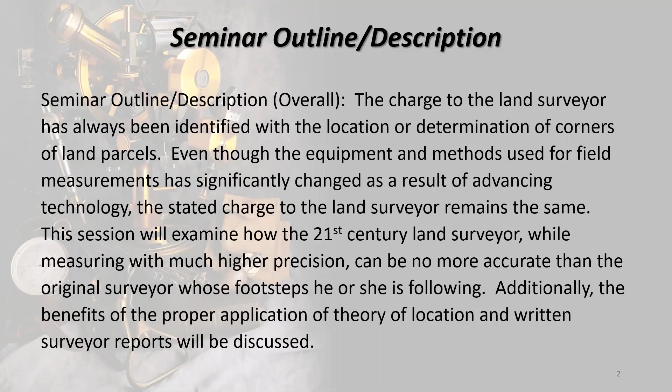So with that, here's the 4th of 4 50-minute sessions on the topic of boundary evidence. And this one is titled Written Surveyor Reports. This session description reads that some states, including Indiana, require written surveyor reports to be included with boundary survey plats. In addition to providing a method to explain the theory of location used to determine the boundary corners, the reports also allow for statements of uncertainty relative to found monumentation, lines of occupation, conflicts with adjoining parcel descriptions, as well as the precision of measurements.

As I look back on the time that surveyor reports were beginning to be required, I remember much mumbling and grumbling of fellow surveyors. For those of you that were in the session we just completed on theory of location, we were about the same time here. Surveyor reports were in that initial release, if you will, of the standards that became Rule 12. Fortunately, some of the surveyors that I spoke most often with, while being reserved about the topic, were not as negative about this new requirement as others.

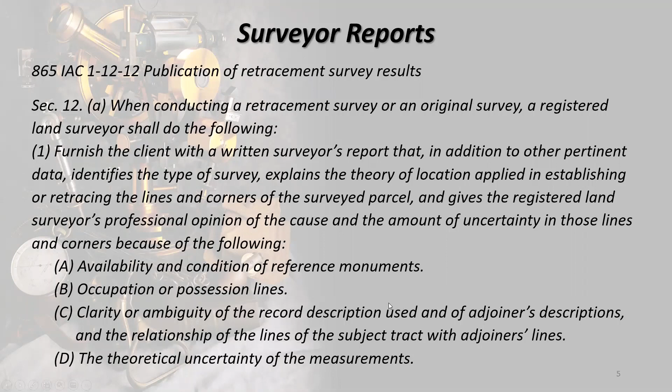Regarding surveyor reports, first off, we can ask a question, why are they necessary? And we'll talk about that. Next, we could ask, what purpose do surveyor reports serve? What's the benefits from surveyor reports? That might be a little bit redundant, but they can also have some separate meanings there.

Who are the surveyor reports written to? I'm going to give you my list, and I always get disagreement if I'm in a live room. I don't think I'll get disagreement today since I wouldn't be able to hear you, but nevertheless, I have my opinion on that. What format, if any, is required? And then we get to why. Well, let's go then and get into that.

And the Board of Registration said if you didn't follow it, you're going to have to come down and talk to us. When I note, because Rule 12 says so, it is not too far from the truth. It was a firm requirement, and those who did not comply, as I said, would likely have to go meet with the Board of Registration.

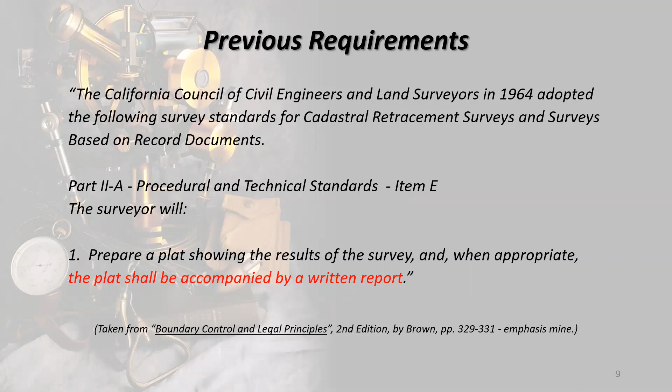And also, the one source that I've cited the most in these 4 sessions here was Evidence and Procedures for Boundary Location, 6th edition. And they have in Appendix A of that text an article called the Surveyor's Report. And it is significantly different than what we're going to see here with what we do with surveyor reports and the mandate for it in Rule 12, but it's a template for a surveyor's report. I don't know if there was a date on it. I didn't go back and look at the older editions of the book to see if it was in there, but I caught it as I was preparing for this session. And I just copied what it said at the beginning there.

It says the document in this appendix is a suggested outline for a report of survey that the professional should prepare to preserve information and to provide the client with an analysis of the work performed. It is suggested that such a report be prepared for each utility survey, but that with a forensic survey, it be prepared at the request of the attorney. We'd have to read into that to see why they would say something like that. I could understand if a forensic survey might have something to do with accident situations or whatever, that maybe the attorney wouldn't want a report to go public. But anyway, the surveyor should provide the client with a copy of the report, but the surveyor should also place a copy in the project files.

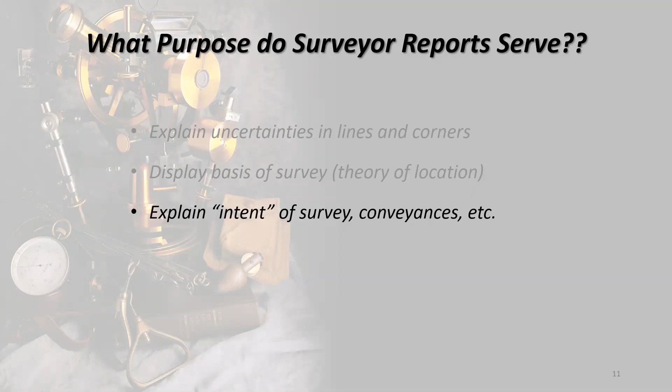In fact, there's new rules in Indiana that if you're going to cut a parcel off of an existing parcel, there's a statement you have to add to the legal description. You might want to look that up. I don't remember the code number, but it was just put in law, I think it was in 2017. You might want to look that up if you're an Indiana surveyor and you haven't heard about that.

Is this an original survey as in a new parcel? That's really important to put there. Someone might be able to figure that out over time, but, and we'll see where I talk about what I typically put in a surveyor report, I state if it's an original survey or a retracement survey. And again, I don't get into personal things, like saying they're fighting here and I'm going to determine who's right and who's wrong, because I don't do that anyways. We just show them evidence, but it's important to know that it's an original survey. Then you know that if it's original, those monuments, that's the parcel. Those are the monuments. Those are the corners.

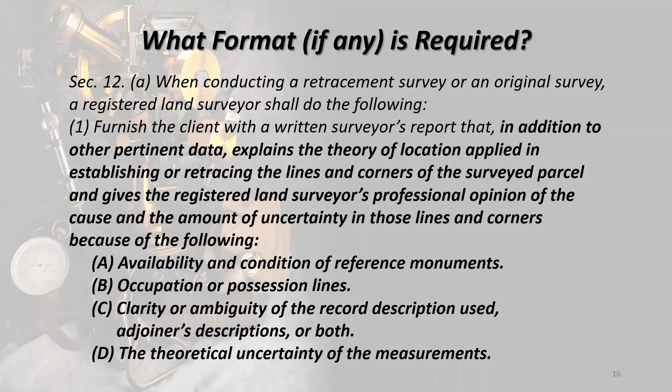Relative to availability and condition of referenced monuments, we got a principle that's in numerous textbooks that says either this exactly or something very close. In order to be controlling, a monument must be called for in the writings, it must be identifiable and it must be undisturbed. Called for in the writings, identifiable and undisturbed. If you don't have all three of those, you don't have a controlling monument. That's why we don't just draw a circle on the plat and not describe what the monument is.

There's a principle that goes along with this out of the evidence and procedures text that says an original monument found undisturbed usually expresses the intent of the parties of the conveyance, fixes that point as between the parties, and as such has no error in position. All restored monuments established by measurements have some error in position. So can we tie these two principles together?

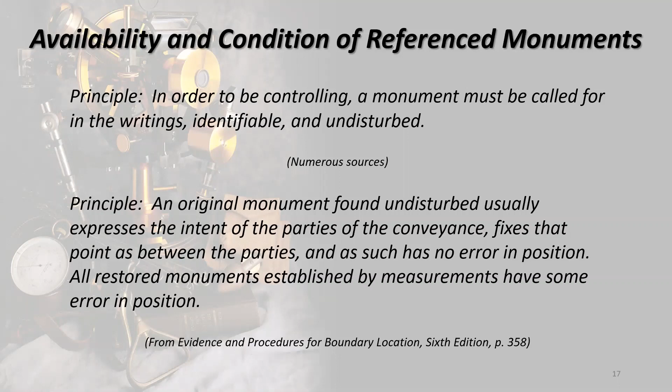If you're calling it an original monument, then you're saying it's been deemed original, so it is controlling. So that now ties directly into what is up above there. In order to be controlling, that means you've determined it as an original monument. The monument must be called for in the writings, identifiable and undisturbed. And then it gives you here what an original monument means. Availability and condition of reference monuments, sticking with that. We could talk about monuments for a whole seminar.

There's a principle from Boundary Control and Legal Principles that says monuments called for in a deed, either directly or by survey or by reference to a plat that the parties relied on, are subordinate to senior rights, clearly stated contrary intentions, and original lines actually marked and surveyed, but are presumed superior to direction, distance, and area.

And then I've got a statement down here that's just a quote. It's not a principle, but it comes from Boundary Control and Legal Principles. And it says that many surveyors are guilty of using non-specific terms such as stake, post, staff, or IP, probably meaning iron pipe or iron pin. You're not sure which one it is. To eliminate future conflict, it is imperative that each monument be identified as to its exact nature, including size, material, and identifying marks. We'll talk more about this as we move on forward here.

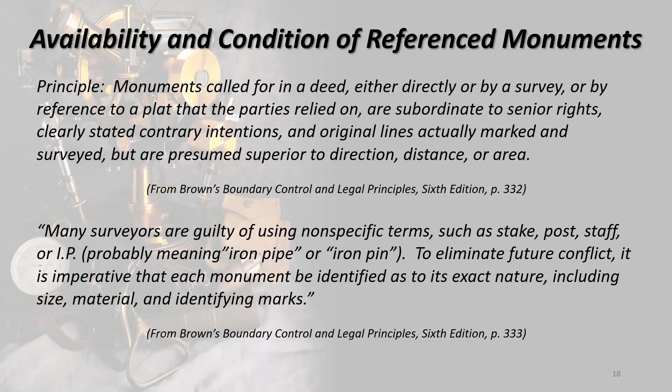And then we have the order of importance of conflicting title elements. And if you took classes on survey law, you undoubtedly came across this. And if you haven't taken them, you probably ran across it anyways, because we refer to this so often. This one is basically taken from Boundary Control and Legal Principles, and this is right out of the most recent edition, the 7th edition.

And I'm going to go through this, because we're going to talk about some of these things as we go through our terminology and relevance to the surveyor report here. We start with A and B, which are two elements that the surveyor really doesn't have a whole lot of control over. The first is the right of possession or an unwritten conveyance, unwritten rights.

And if you know your survey law and your property law, every state has a statute of limitations and a bunch of requirements that are necessary in order for somebody who occupies somebody else's land to rightly at some point gain title to that land by an unwritten conveyance. That's adverse possession, and the other types of recognition and acquiescence and things like that.

Then you have senior rights, and that's in the event of an overlap. That's if you've got a 100-foot parcel and you divide it in such a way and you think you're supposed to have two 50-foot parcels, but the geometry doesn't give you 50-foot widths and you've got an overlap, then the first one, if it's not subdivided, the first deed in, typically in most states, gets their 50 feet, then the other one gets the remainder. Okay, and that's something else that a survey really can't do anything about.

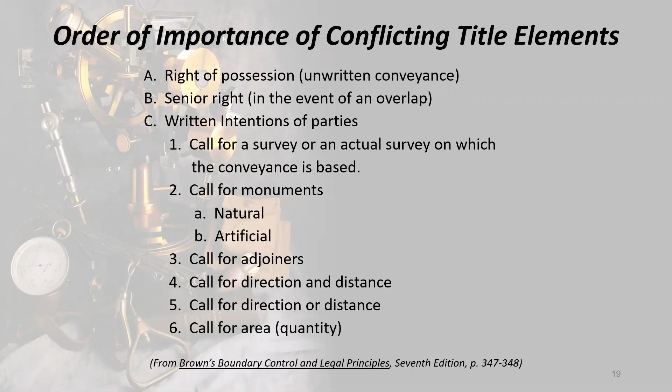Okay, occupation and possession lines. We've got some principles here. Possession may memorialize original survey lines, and as such may be the best or worst evidence of original lines. That comes from Evidence and Procedures. Because original lines surveyed and marked by the creating surveyor control over other elements in a deed, the surveyor must determine whether the line of possession recovered is the best remaining evidence of the original line marked.

And then it says any unwritten right of possession that ripens into a fee right extinguishes prior title rights. And normally, and we should know this as surveyors, a surveyor in the United States does not decide who has unwritten rights. He or she merely notes the evidence of encroachments and evidence of other surveys. The final decision is a legal one that is made by the courts. And we better make sure that if there's an encroachment possible, we show it on our plat, because we can be drawn into that if there was an encroachment and we didn't show it on the plat.

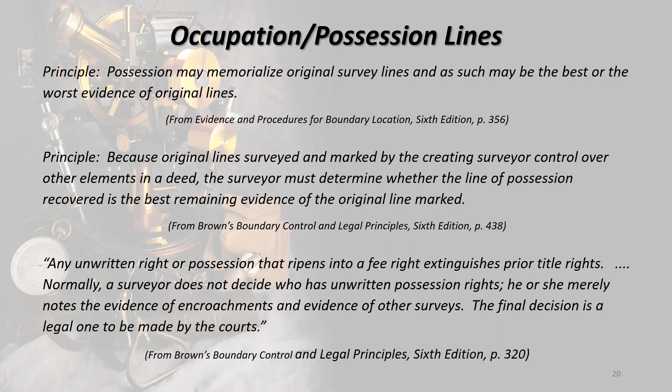Getting back to our friend Cooley, who we've cited in most of these sessions here: occupation, especially if long continued, often affords very satisfactory evidence of the original boundary when no other is attainable. And the surveyor should inquire when it originated, how and why the lines were then located as they were, and whether a claim of title has always accompanied the possession, and give all the facts due force as evidence.

Unfortunately, it is known that surveyors sometimes, and he wrote this back in the 1880s, but we can still probably find surveyors that fall privy to this today too. The surveyor sometimes, in supposed obedience to the state statutes, disregards all evidences of occupation and claim of titles, and they plunge whole neighborhoods into quarrels and litigation by assuming to establish corners at points with which the previous occupation cannot harmonize.

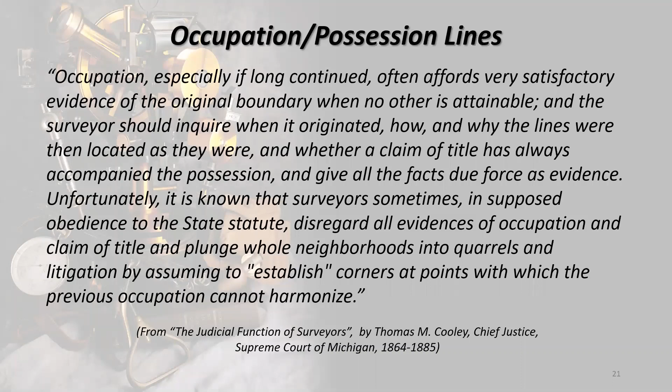And I again refer you who have been in the past 3 sessions. This relates to my survey that I keep referring to with the infamous PK nail at the proportional north quarter corner. It's this statement here from Cooley that really helped lead me to the decision that I came up with relative to what I was going to hold for that survey.

And then we get into relative positional accuracy. This is akin to the relative positional precision in the ALTA standards. It's really the same thing. Indiana has more classes to look at for the types of surveys and the way that the property is used, but ALTA surveys has just the most stringent. And this is statistically based. If you've done anything with statistics, you understand the bell curve.

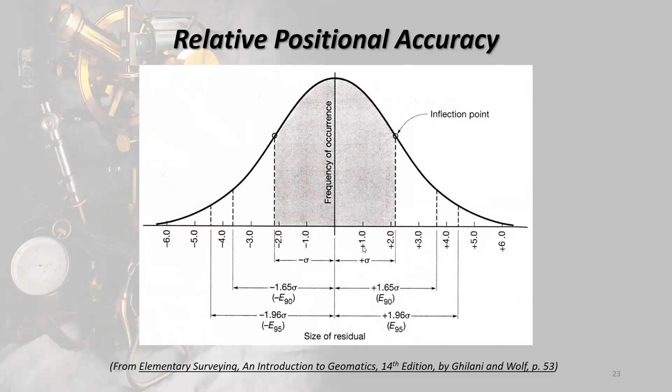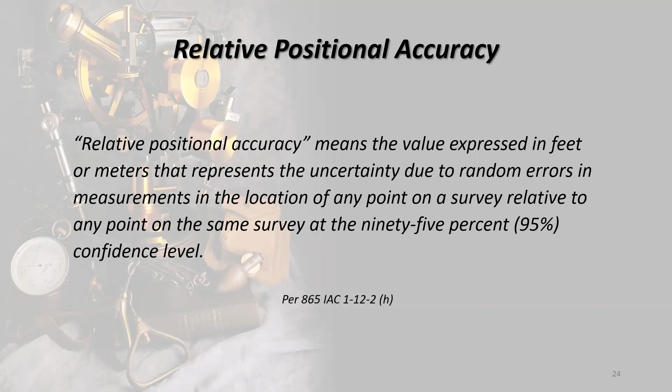Relative positional accuracy means the value expressed in feet or meters that represents the uncertainty due to random errors in measurements in the location of any point on a survey relative to any point on the same survey with 95% confidence. And you'll see the same definition in the ALTA standards.

Measurements for retracement surveys relative to Rule 12. It says the purpose of this section is to prescribe precision and accuracy standards to be used by a land surveyor in conducting original and retracement surveys and route surveys. The land surveyor shall select the appropriate equipment and methods and use trained personnel to assure that the acceptable relative positional accuracy specified in this section is not exceeded.

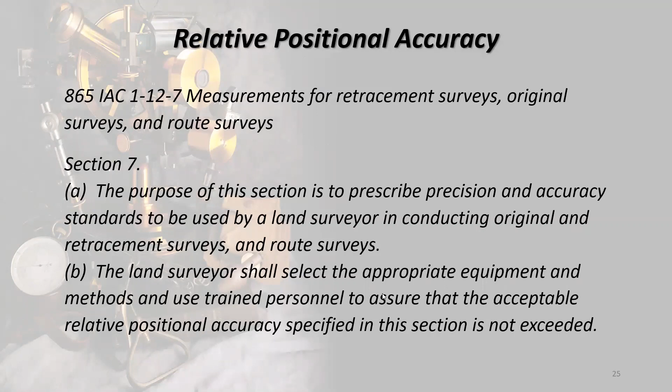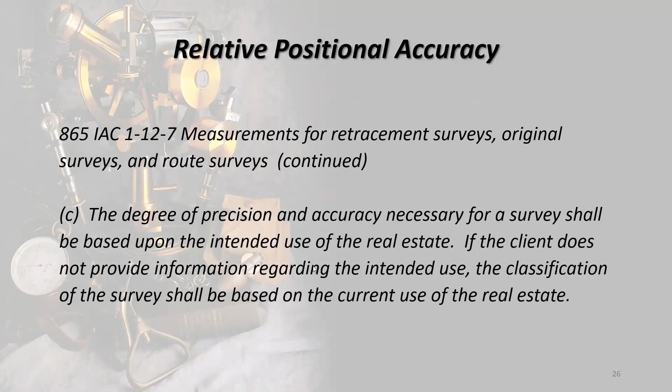Continuing, it says the degree of precision and accuracy necessary for a survey shall be based upon the intended use of the real estate. If the client does not provide information regarding the intended use, the classification of the survey shall be based on the current use of the real estate. And that's going by zoning primarily, the type of zone that you would think with the type of use that you observe while you're there.

And the classifications that they have are, first we got the urban surveys, which are performed on land lying within or contiguous to a city or town, except for single-family residential lots. And urban surveys include commercial or industrial properties, condos, townhouses, apartments, and other multi-unit developments, regardless of geographic location.

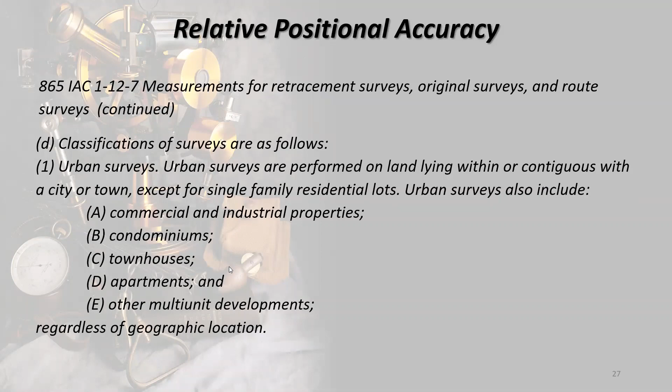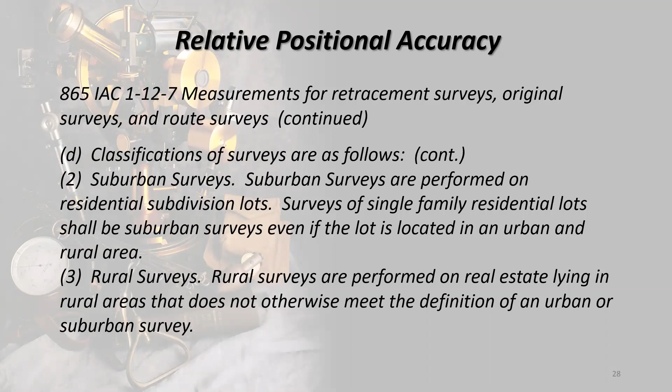We have suburban surveys, which basically are residential subdivision lots. Surveys of single-family residential lots shall be suburban, even if the lot is located in an urban area. It's use-based. And then you have rural surveys, which are performed on real estate lying in rural areas that does not otherwise meet the definition of either urban or suburban.

And then we have our statements of measurement. There's 3 of them. For the urban survey, we have the same one that's in the ALTA standards, plus or minus 0.07 feet or 21 millimeters plus 50 parts per million. Suburban surveys would be plus or minus 0.13 feet or 40 millimeters plus 100 parts per million. And then the rural survey would be plus or minus 0.26 feet or 79 millimeters plus 200 parts per million.

And again, the relative positional accuracy is identical in definition, other than the different types or classifications, if you will, to what's described in the ALTA standards, but the word precision is used there. And I said this in one of the previous sessions that whenever the opportunity is right to go in and change statute law, from what I understand, those in the state society in Indiana that work with this, that's going to happen. They want the word accuracy taken out here and precision put in. With our discussions in the previous session on accuracy and precision, I think you would agree.

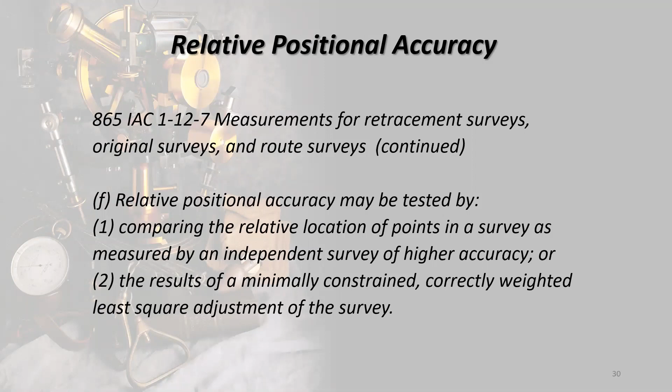Relative positional accuracy may be tested by comparing the relative location of points in a survey as measured by an independent survey of higher accuracy, or by the results of a minimally constrained, correctly weighted least squares adjustment of the survey. And again, that's pretty close to verbatim at least, to what's in the ALTA standards.

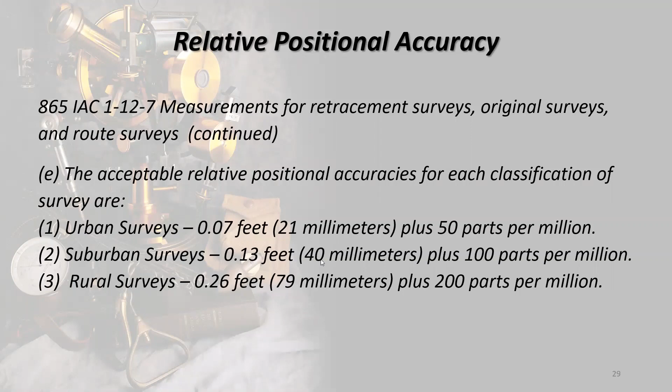And then we work with the relative positional accuracy of measurements, make a very simple statement to that. I usually state what class survey it is, and I usually just state that the uncertainties were within the range of the relative positional accuracy for an urban survey, which is plus or minus this or that. Those plus or minuses are very forgiving, by the way. If I can skip back a couple, these statements here, the urban survey, suburban survey, and rural surveys, these formulas, if you figure those out for the amount of measuring that you do, they're very forgiving.

And then I have other notes. I refer to a title commitment. If I was given a title commitment, I say who the title company was and what the commitment number was. If I didn't get a title commitment, I certainly state on there that a title commitment was not provided for use on this survey. There could be information in there that I don't have.

We certainly state the basis of bearings, and we do a lot of GPS. We still do surveys and maybe rotate a parcel if you've got a lot of parcels around it that are on a common basis of bearings, and we call that assumed. Every survey is different, but we try not to put a piece of a puzzle that's rotated differently from what's around it. And then we summarize the survey methods that we used. Did we have open traverse, total station, GPS, and all that I talked about.

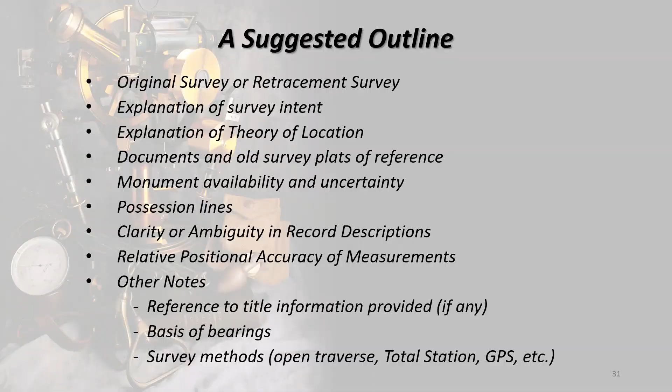So coming back to here, I have a couple of very short statements because we're almost out of time, for my favorite survey of the day, which I think I've mentioned in 3 of the 4 sessions. When we came to the decision to hold the PK nail at the proportional corner and ignore the actual quarter corner, we thought we had enough evidence to put it there, but so much development took place after that PK nail was set and held, because the county surveyor set it and put it in the indexes as the corner.

And so much took place on both sides of this north section line that it would have been like what we saw with Cooley a few slides back. We would have been throwing neighborhoods into constant litigation. Moving our parcel would push somebody else one way or the other. It would cause gaps on one side, overlaps on the other, and could have a ripple effect. So to keep peace in the neighborhood, if you will, we held that proportional point.

But it was very fortunate that we had to write a surveyor's report, because I was able to explain why we held that proportional point, even though we had evidence that the actual quarter corner was located a certain amount north and west of the proportional corner. And the actual corner also fit with the legal survey that I mentioned. So without a surveyor report, it would have been a bunch of notes that may not have tied together as well. That is really all I can say about the surveyor report, other than all the normal stuff that would go in there for a survey like this.

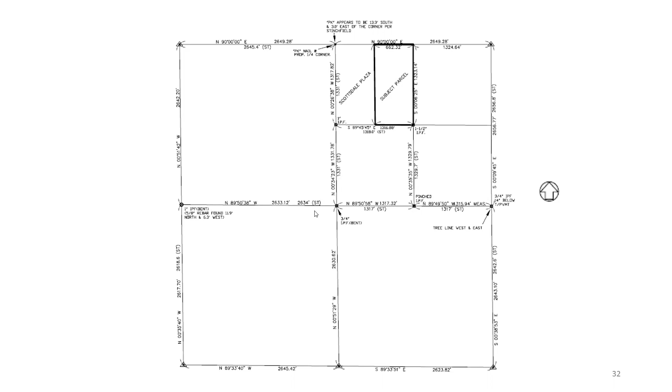So I think we're right on time. That takes us to the end of this, and this is the last of the 4.